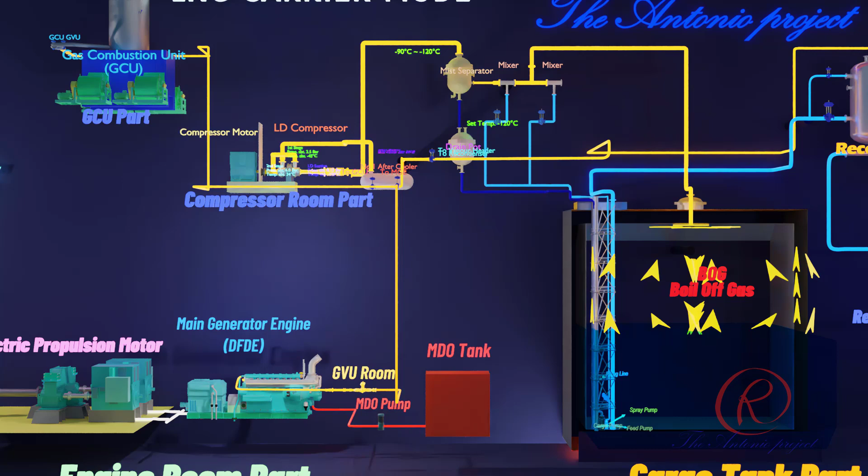LNG Carrier Mode depends on the type of floating storage and regasification unit, or FSRU. Some FSRU are equipped with propulsion unit and some are not, depending on the necessity and the project they run into. For FSRU equipped with propulsion engine, they are able to shift easily from one project to another place. Meanwhile, for non-propulsion engine type, this FSRU requires tugboats for moving from one place to another.

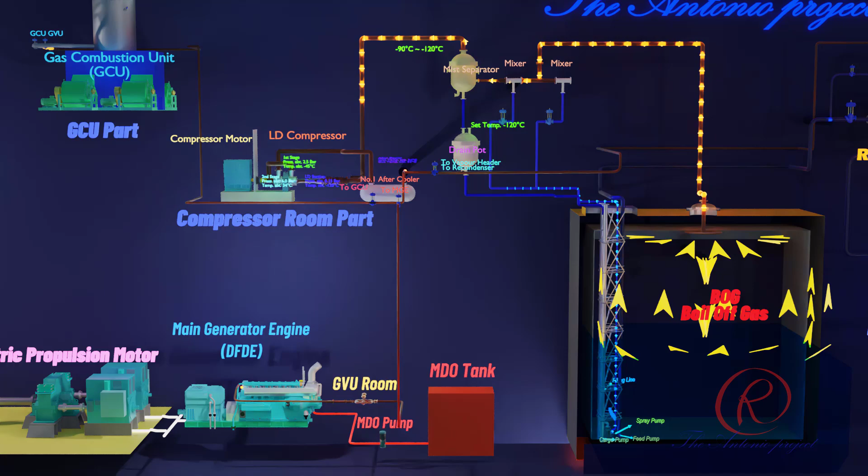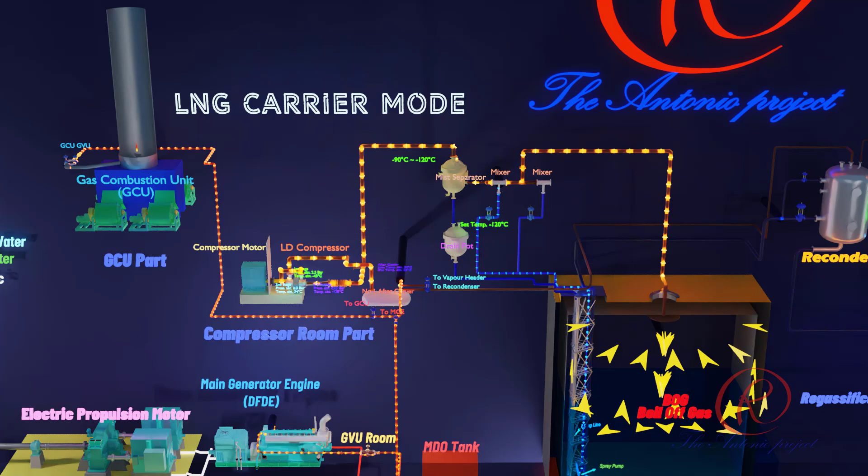This animation is based on FSRU with electric propulsion motor with dual fuel diesel engine, or DFDE, as main generator engine. This type of FSRU can change its mode from LNG carrier mode to FSRU mode. Under LNG carrier mode as a vessel, FSRU transports LNG by loading from LNG terminal toward discharging terminal or regasification terminal. During transportation, FSRU uses its electric propulsion motor to sail across the ocean. The electric propulsion motor receives power from electricity generated by the DFDE.

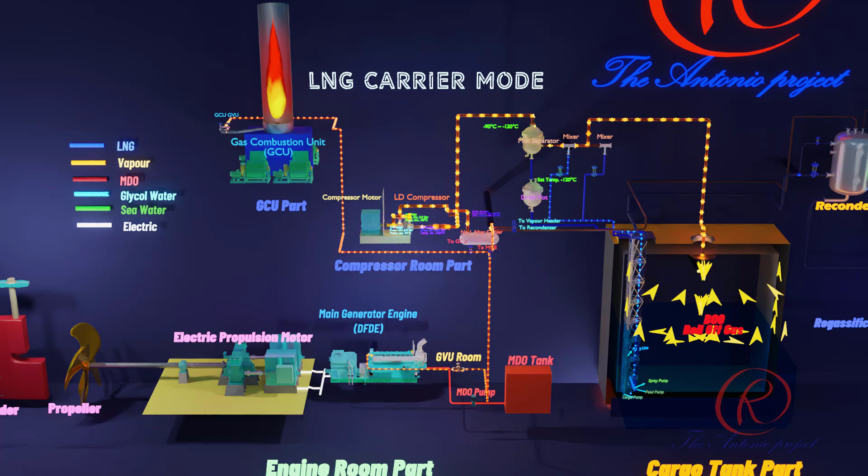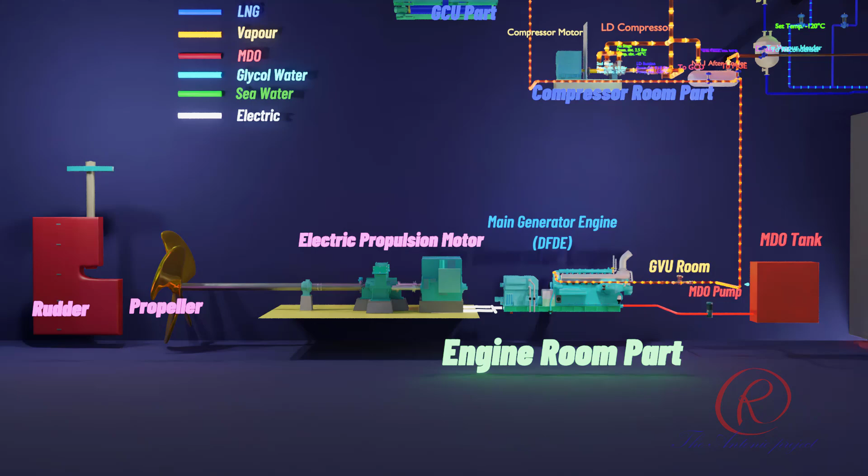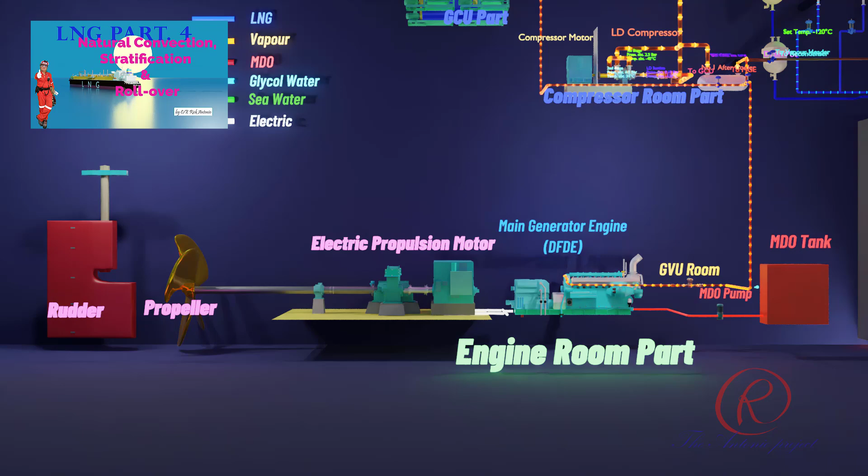Dual fuel diesel engine is an engine able to use both fuel oil and natural gas for combustion. DFDE uses low sulfur MDO or MGO as main fuel and pilot fuel, and for fuel gas, DFDE receives natural gas, known as boil-off gas or BOG, from the cargo tank. LNG cargo in the cargo tank always generates BOG due to natural convection, and it is unavoidable. Generated BOG must be removed to preserve tank pressure. For details about natural convection, please watch my previous video about natural convection, stratification, and rollover. BOG is then compressed by low-duty compressor, then supplied to DFDE as fuel gas.

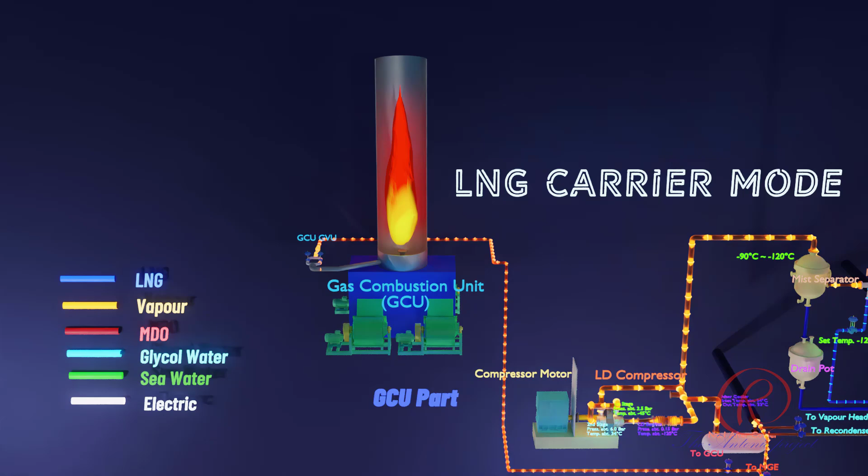Gas combustion unit is used for burning excess BOG from cargo tank which is not used by DFDE or other engines, in order to maintain tank pressure, ensuring secure disposal of BOG that inevitably releases from LNG cargo, preventing release of methane directly to the atmosphere.

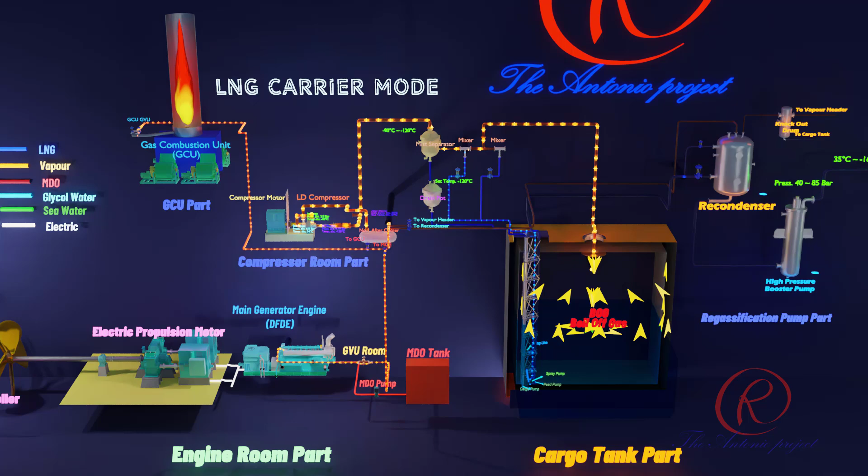FSRU mode: closed loop glycol water indirect heating methods.

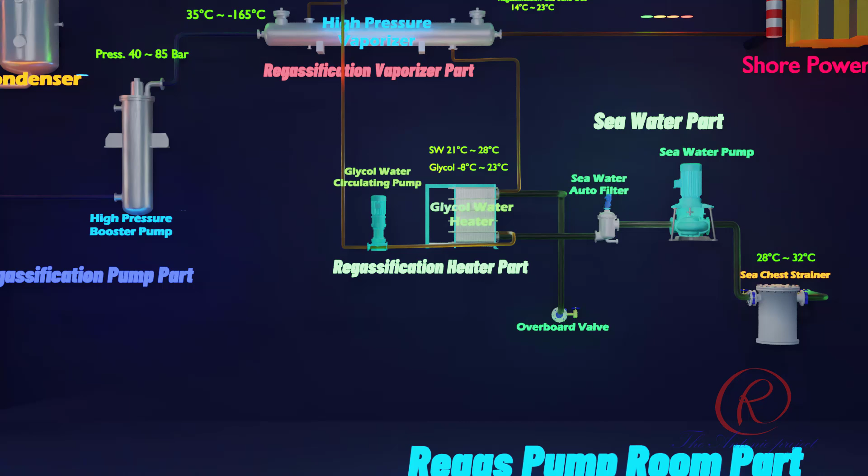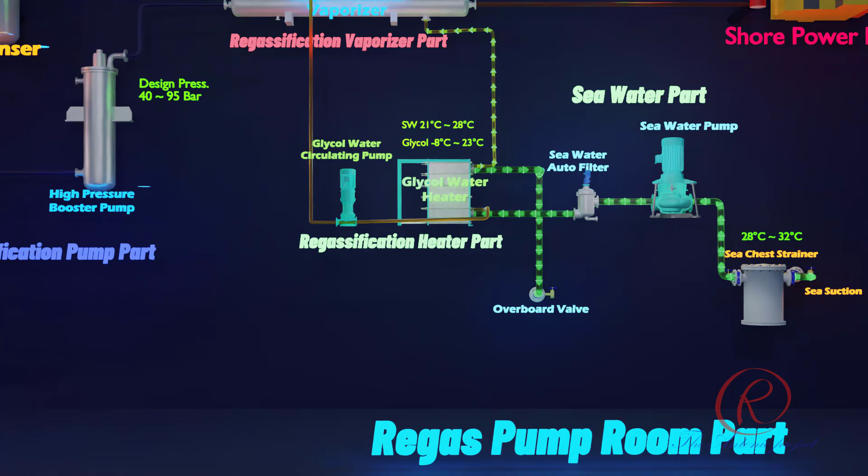When FSRU arrives at the regasification terminal, the operational mode changes from LNG carrier mode to FSRU mode. In this animation, the regasification is a closed loop glycol water indirect heating method. LNG vaporizer indirect heating method uses seawater as the heating media to heat up glycol water. Then heated glycol water vaporizes LNG at the LNG vaporizer. Seawater is taken from outside via sea chest, then discharged overboard. This is called an open loop system, while the heated glycol water is a closed-loop system, recirculated in the glycol water system.

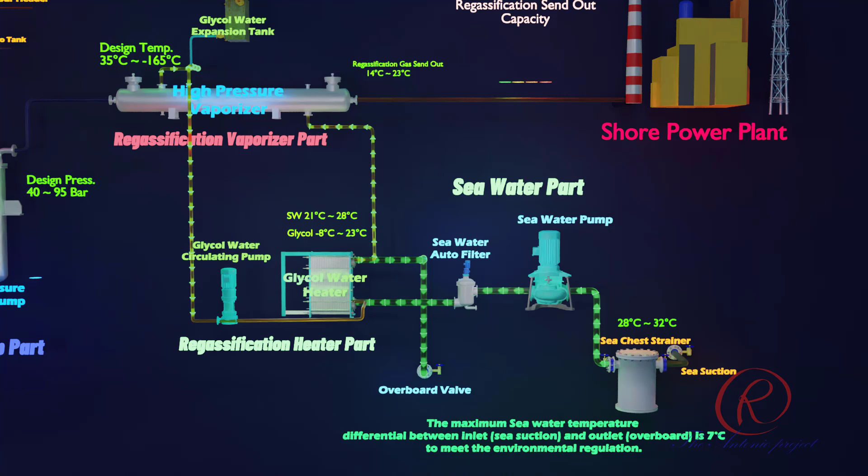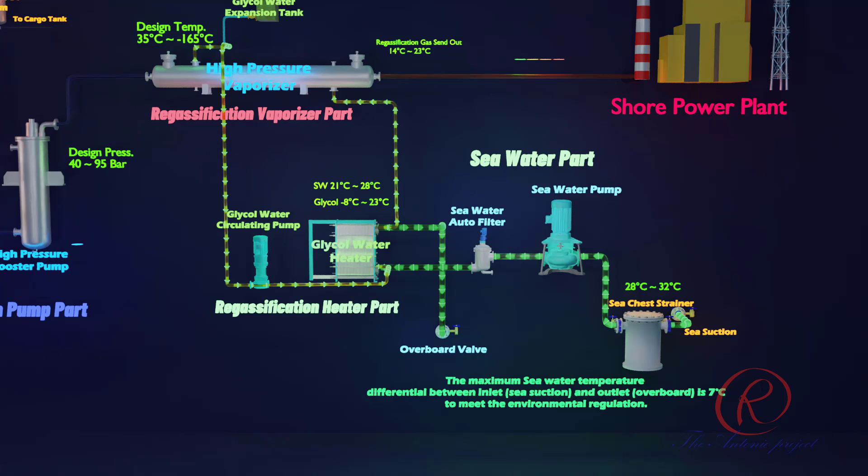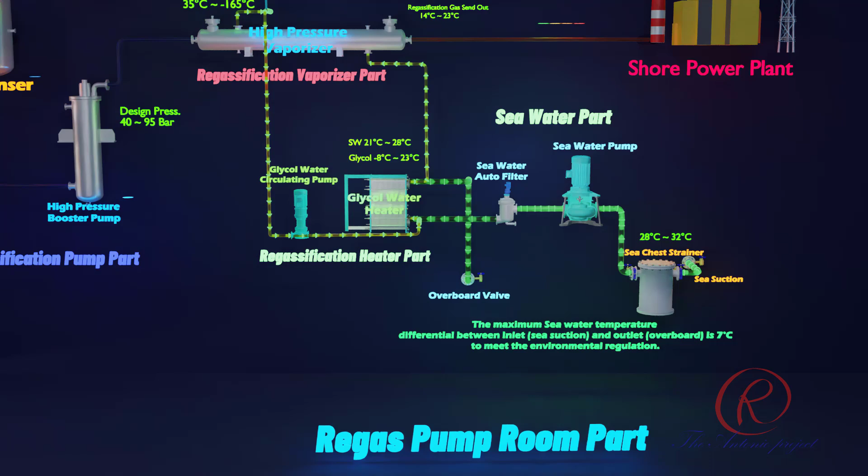This indirect method is most suitable for tropical areas, with seawater having temperature between 28 to 32 degrees Celsius. This temperature is enough to vaporize LNG to natural gas, or NG, with outlet temperature about 14 to 23 degrees Celsius. It is energy saving, effective, and efficient since it does not require any steam energy to heat up the glycol water.

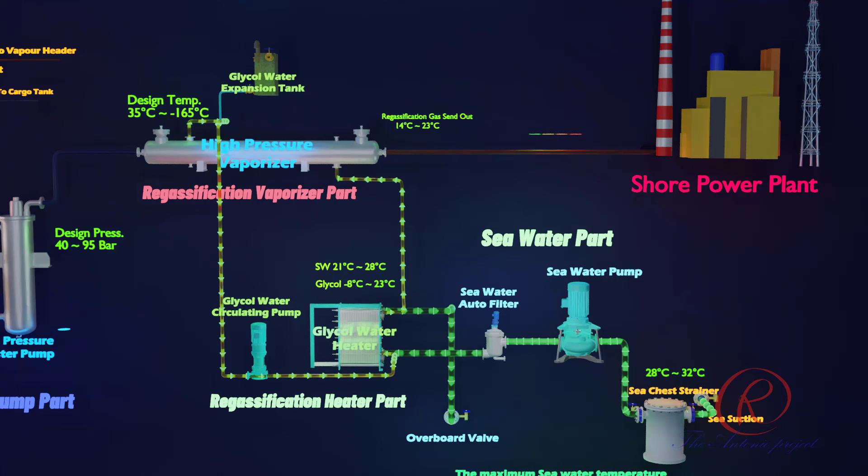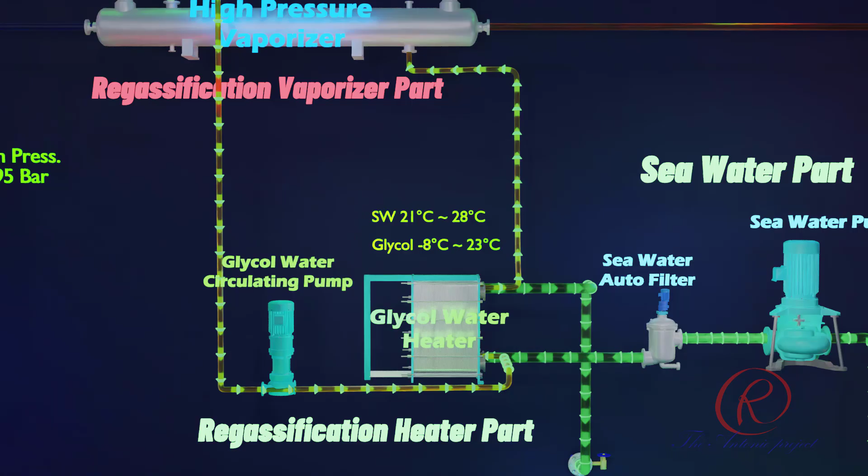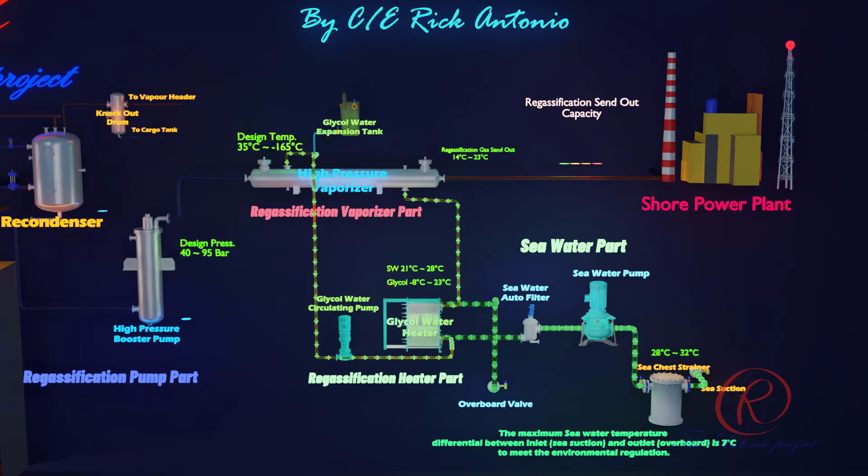Before entering the system, seawater is treated with MGPS injection to prevent any marine growth on the seawater piping system, then filtered at autofilter to remove any dirt from seawater to prevent clogging on the glycol water heater. Glycol water heater is a plate heat exchanger type, where hot and cold fluid streams flow in alternate channels separated by the plate. Glycol water heater is a type of heater that uses a glycol solution, or mixture of glycol and water, as an intermediate fluid to transfer heat from seawater on the glycol water heater to efficiently vaporize LNG.

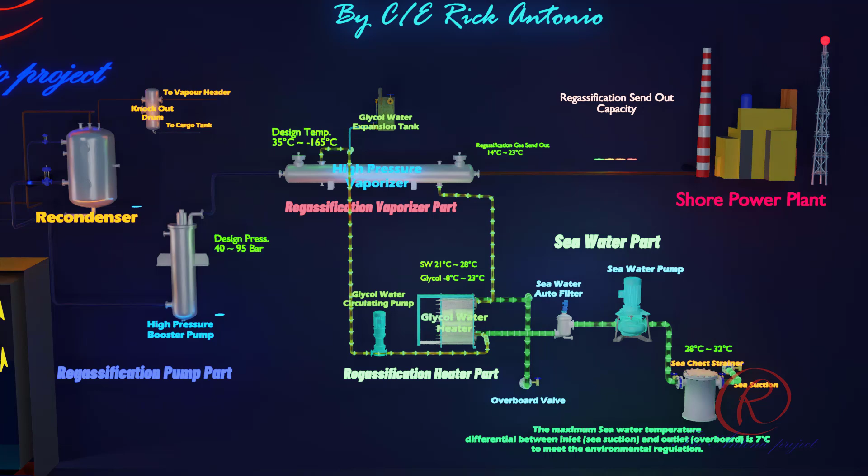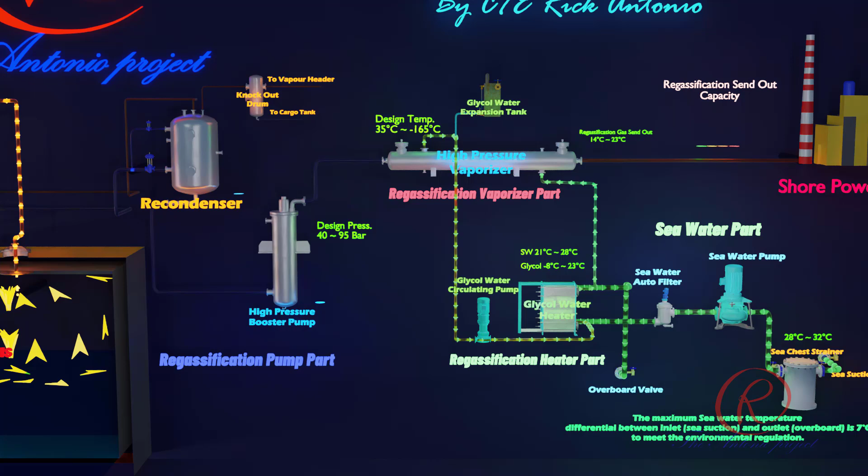In order to meet environmental regulation, the maximum seawater temperature differential between inlet, or sea suction, and outlet, or overboard, is 7 degrees Celsius. In order to introduce LNG to the regasification system, the glycol water and seawater heating system should be running in advance.

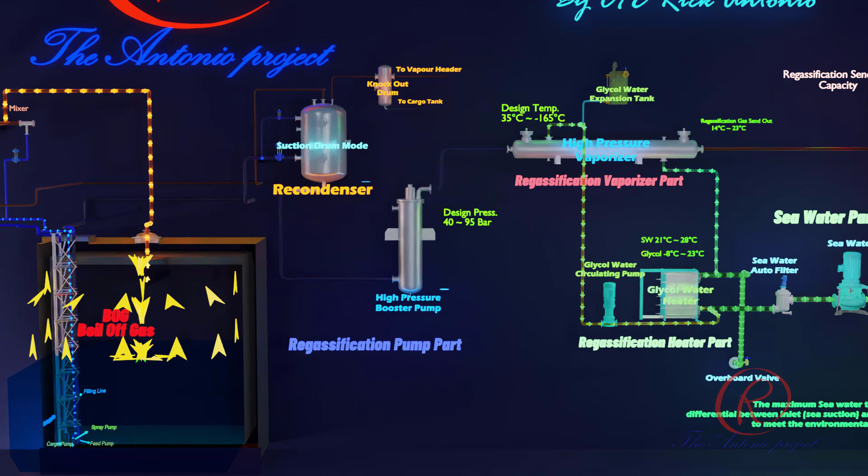Regasification with suction drum mode. LNG inside the cargo tank is stored for the purpose of reserving gas fuel for consumers. Usually the main consumer is a power plant for fueling their gas engine or boiler. LNG can be used as fuel in the form of gas. Therefore, regasification is required to transform the state of LNG from liquid state to gas state.

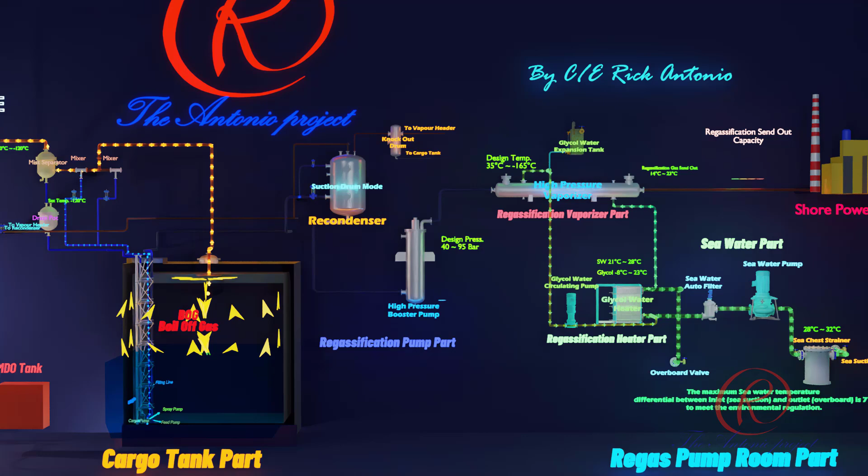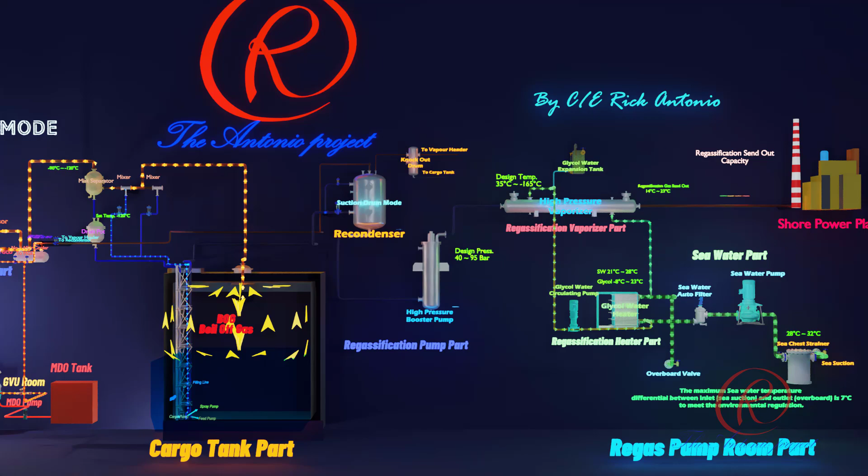During storage, LNG generates BOG, which must be removed to preserve tank pressure. BOG is consumed by boiler and DFDE as fuel, and the excess BOG is burned at GCU to prevent release of methane to atmosphere. To supply LNG to the regasification system, feed pump or emergency cargo pump is used to feed the recondenser and high pressure booster pump.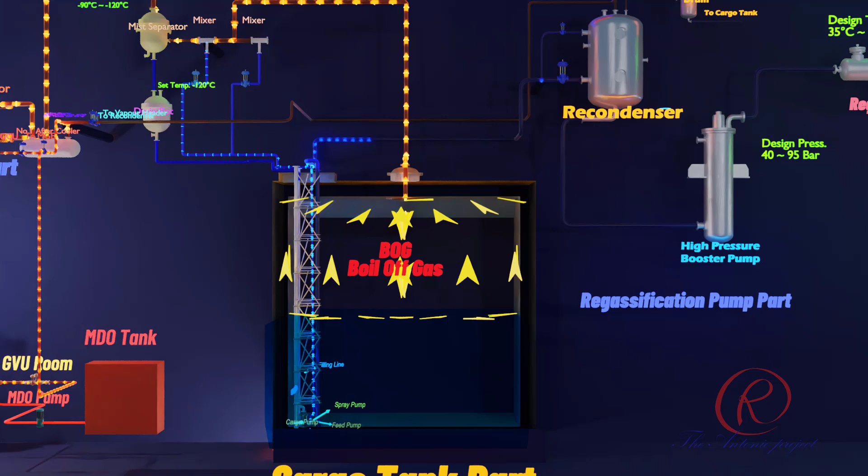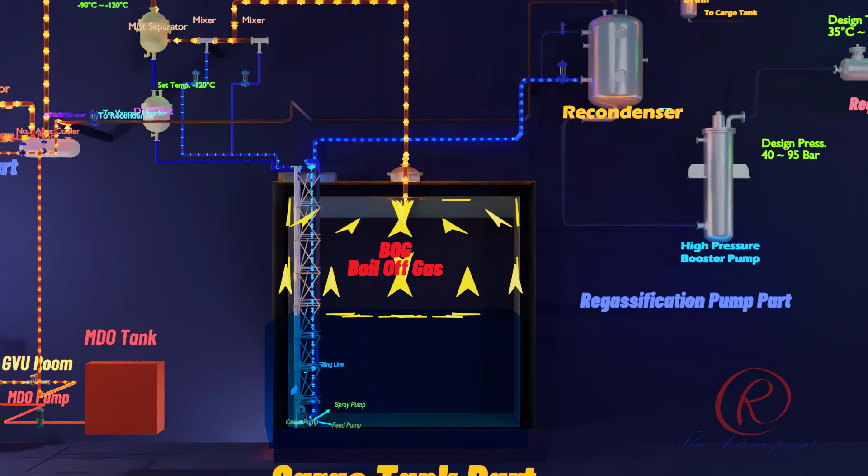Before filling LNG to the regasification pipeline and equipment, it is necessary to carry out a cool down operation. The cool down operation is carried out in order to lower the regas system, such as pipe and equipment temperature, close to fully refrigerated condition prior to regas operation. This will prevent any undesirable shock cooling of the regas system and minimize the amount of liquid flashes within the pipe and equipment.

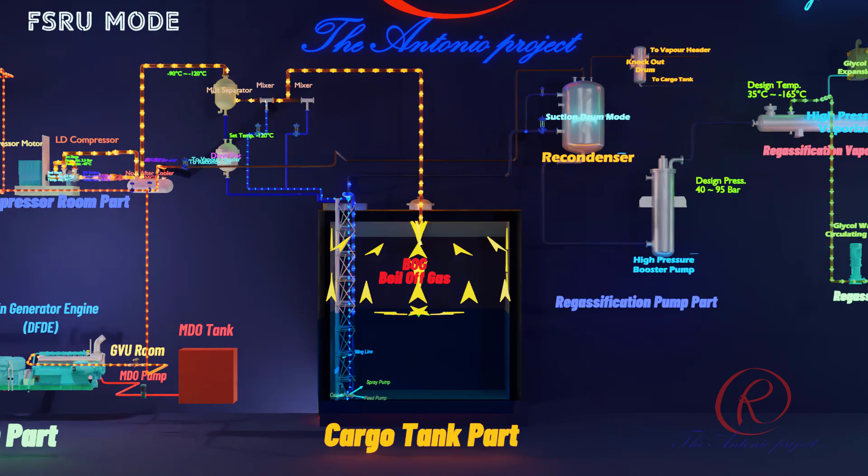The cool down will be carried out before LNG is supplied to the regas system using stripping or spray pump. In the initial state of cool down operation, the small inlet control valve should be kept 10% open manually to cool down pipeline and regas equipment by displacing vapors in piping or LNG heater from cargo tanks to recondenser or suction drum. When the cool down is finished, LNG can be filled to suction drum or recondenser with pressure about 4.5 bar using feed pump.

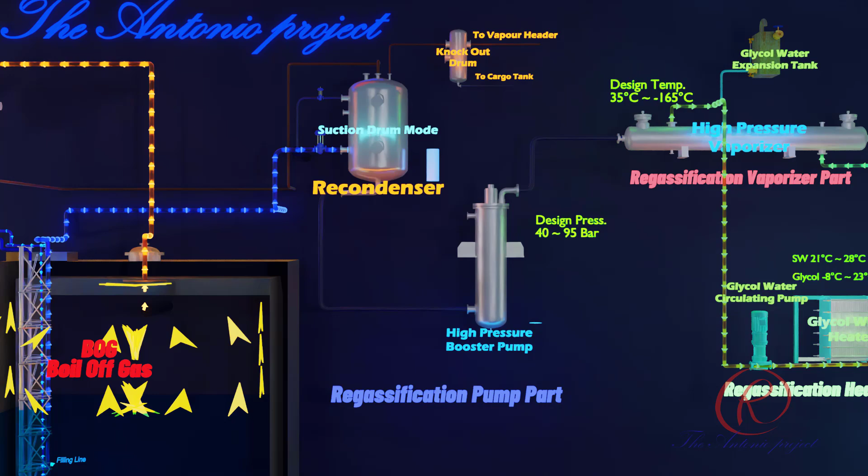Recondenser can be operated in two modes: suction drum mode and recondenser mode. In suction drum mode, recondenser is used as a buffer tank for feeding the high pressure booster pump. Meanwhile, in recondenser mode, recondenser is used as a buffer tank and condenses BOG which is generated from the cargo tank. Initially, recondenser is under suction drum mode, and in this mode the suction drum works without BOG flow.

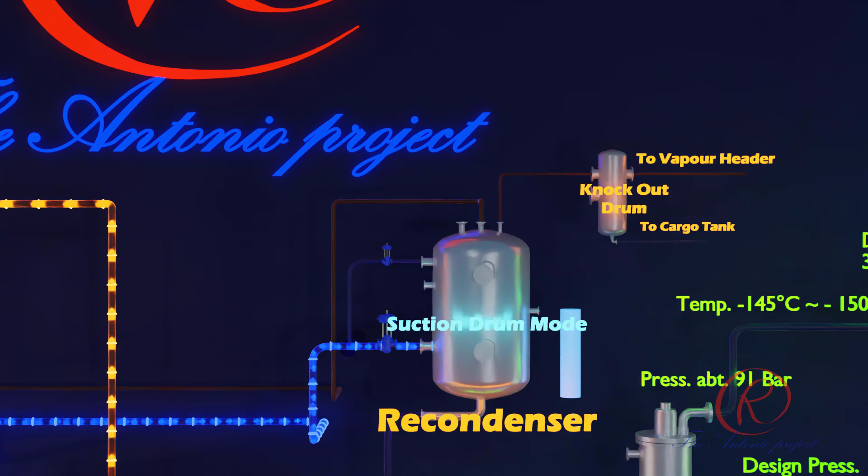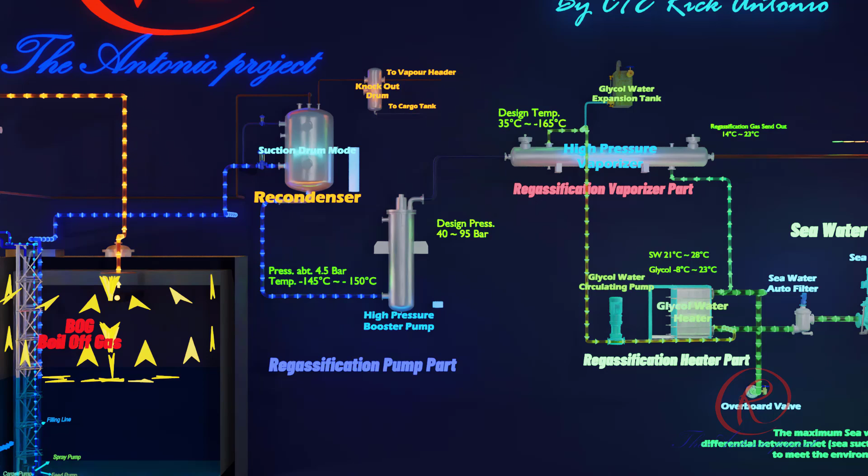About 12 hours before the intended startup of regasification operation, the cool down of the high pressure booster pump pots and pump should be started. The cool down is done by gradually raising the level of LNG in the pump pots by feeding LNG through the filling or drain line at the bottom of each pump pot. After the suction pot has been filled with liquid, observe a 3-hour soak time. The pump shall remain submerged for a minimum of 3 hours to allow thermal stabilization of all internal components.

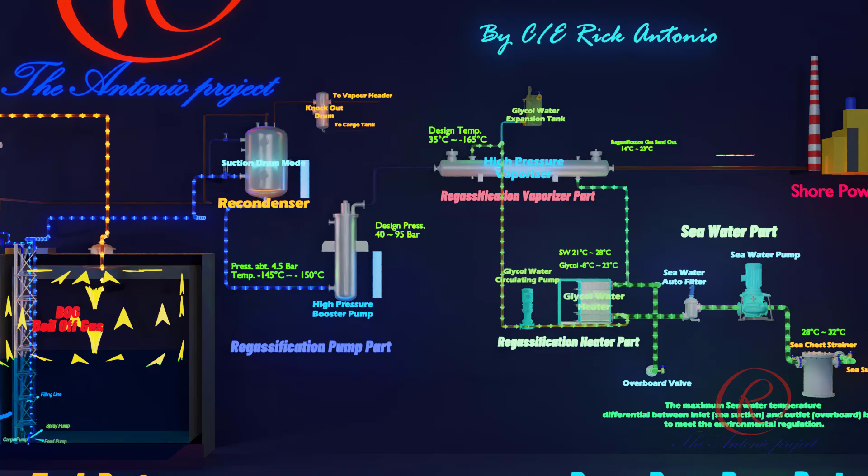High pressure booster pump is used to pressurize LNG from about 5 bar to about 90 bar, then deliver it to the high pressure vaporizer to be vaporized. High pressure gas is required due to the location of the FSRU being miles away from the power plant, where the natural gas is consumed as fuel for the turbine gas engine or boiler to generate electricity.

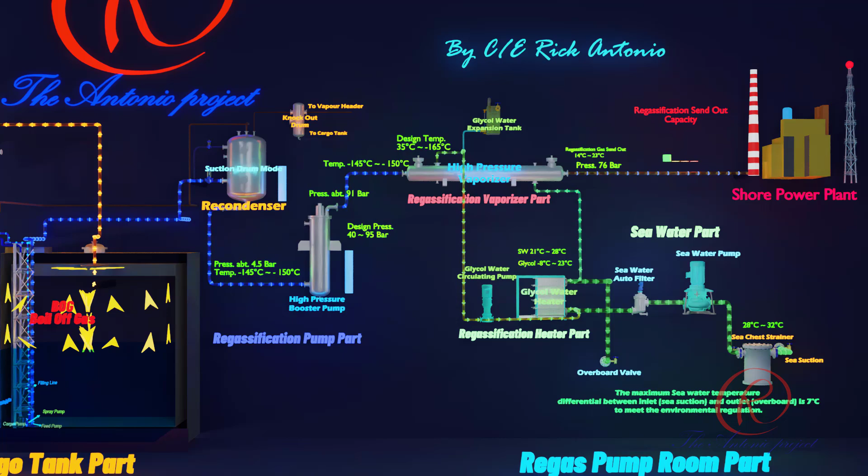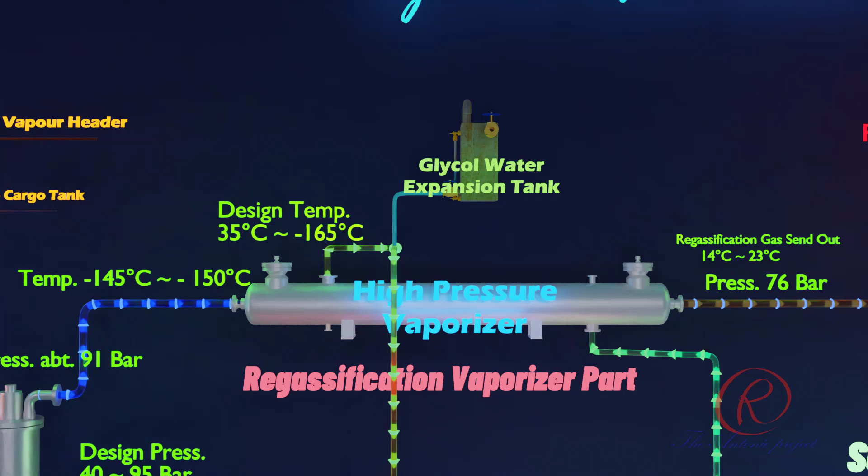LNG from the HP booster pump enters the inlet of the high pressure vaporizer with pressure about 91 bar and temperature between minus 145 degrees Celsius to minus 150 degrees Celsius. LNG, which is in liquid form, is converted to gas form by transferring heat energy from glycol water to LNG, with outlet temperature from vaporizer about 14 to 23 degrees Celsius. Glycol water inlet temperature is about 21 to 28 degrees Celsius, and at the outlet about 6 to 14 degrees Celsius.

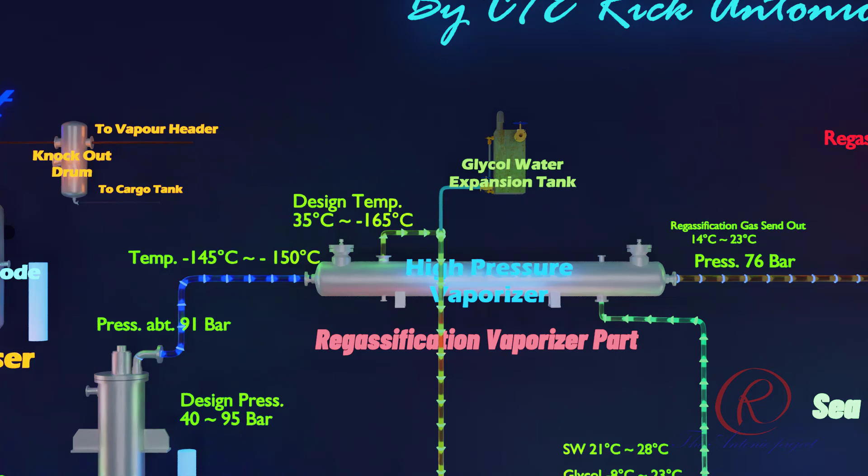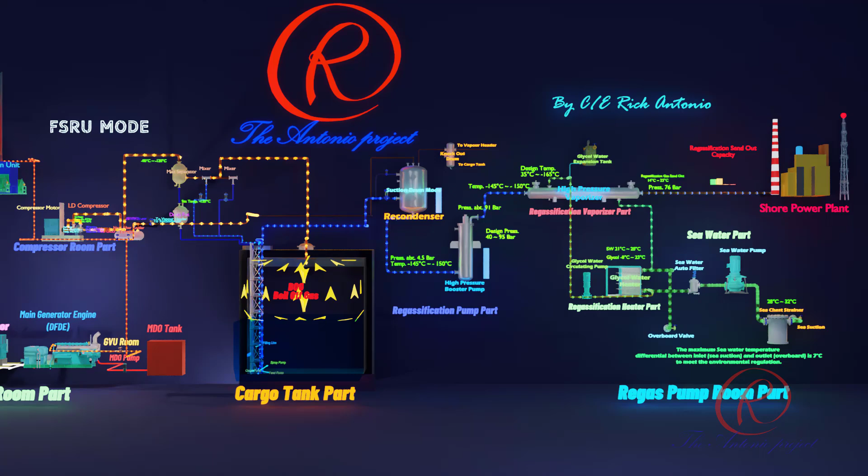Regasification with recondenser mode: the BOG generated from cargo tanks is consumed mainly as fuel, and excess BOG will be burned at GCU. The concept of recondenser mode is to save BOG from disposal at GCU by recondensing the excess quantity of BOG and sending it for regasification. The process is by increasing send-out capacity and slowly reducing GCU flow.

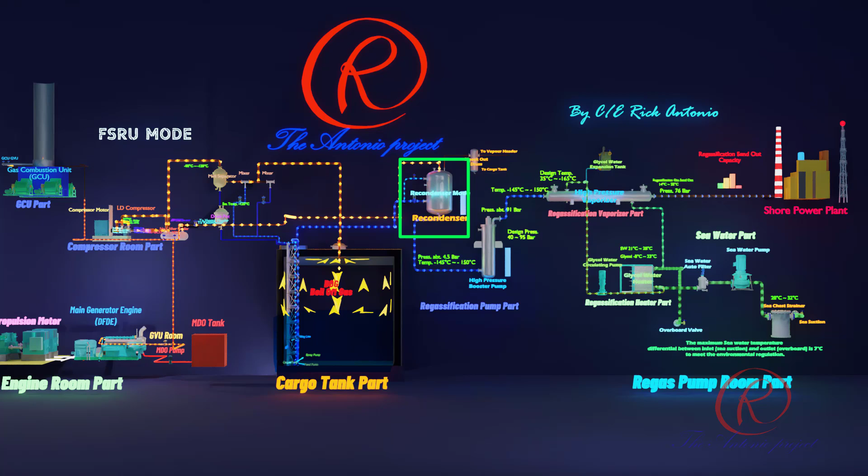In parallel, BOG is supplied to the recondenser. When gas flow to GCU reaches minimum flow, GCU then stops, and all excess BOG is shifted to the recondenser. Condensation of BOG shall be achieved by packing between subcooled LNG from the feed pump and compressed BOG from the LD compressor inside the recondenser under recondenser mode.

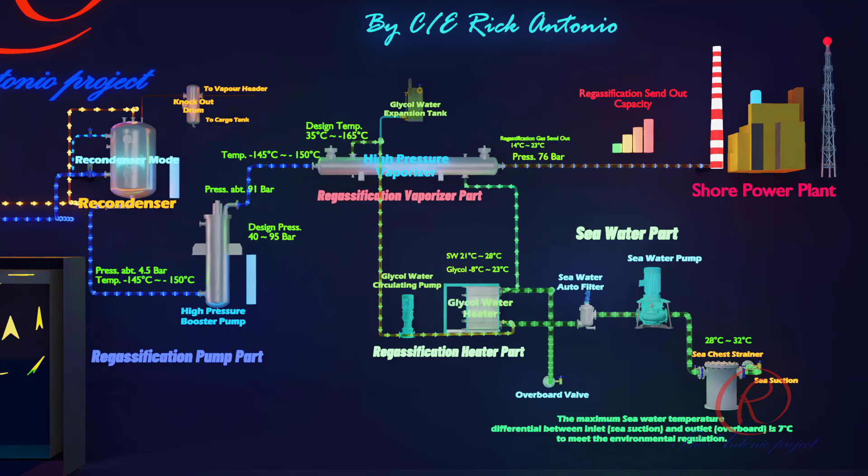The regasification process between suction drum mode and recondenser mode is the same. The difference is the function of the recondenser. In recondenser mode, the recondenser has two functions: one, used as a buffer tank for feeding the high pressure booster pump; two, to condense excess BOG which is generated from the cargo tank.

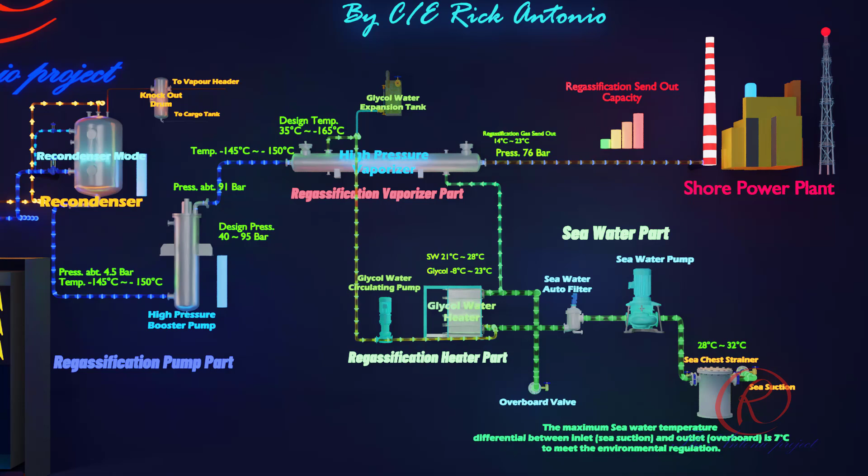High pressure natural gas, which is converted from liquefied natural gas by a vaporizer, is then delivered to the power plant at shore. The pressure is to be maintained at about 76 bar or as per the requirement of the power plant. Natural gas sent out is measured in mmSCFD, or million standard cubic feet, where mm in mmSCFD stands for 1000 times 1000.

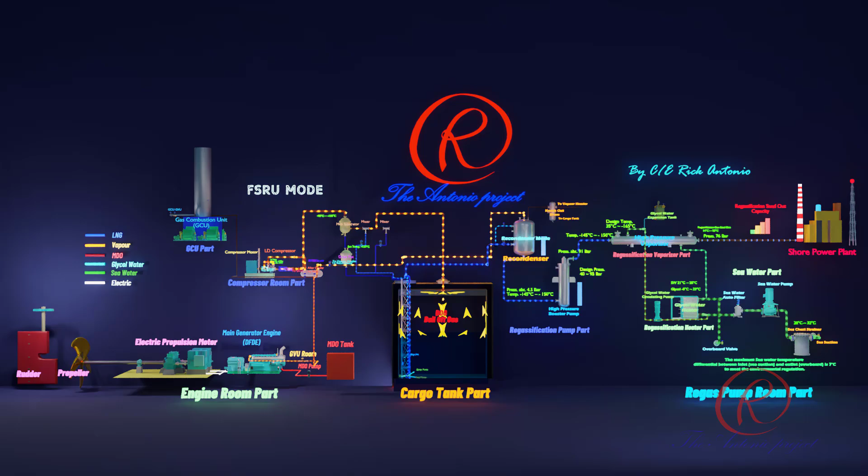I hope that my video has provided valuable insight into the process of LNG regasification, its significance in the energy industry, and its contribution to a greener planet.